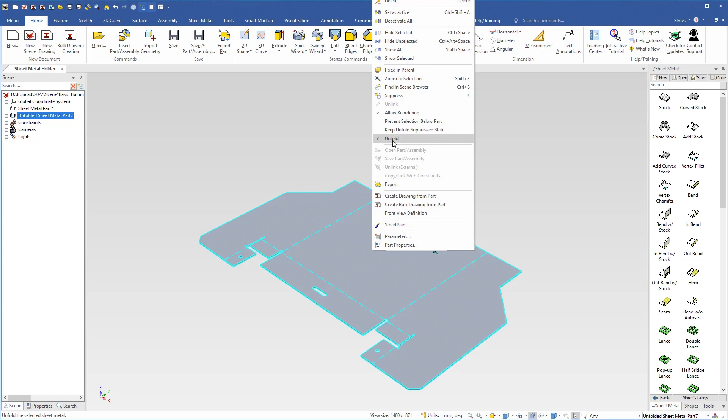To refold the holder, you select it again, right-click and uncheck the Unfold option here to refold it. And there is another way to do it. If you select the holder, come up here to select Sheet Metal tab, and here you have Unfold Sheet Metal to unfold that holder. So to refold, you select the holder and come up here to refold the holder again. But the easiest way to do it is to select it and then right-click to unfold.

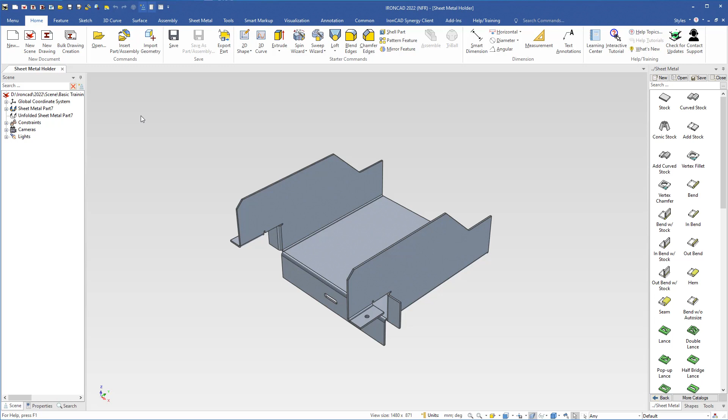So now when we have unfolded the holder, we have also an unfolded part here in the scene browser. Now it is suppressed. But when we have this unfolded part, now we can create a drawing of it. So I come up here to click this button to open the template window, and at the bottom we find a template, scale 1:1 for DWG export. I will select that template and click OK.

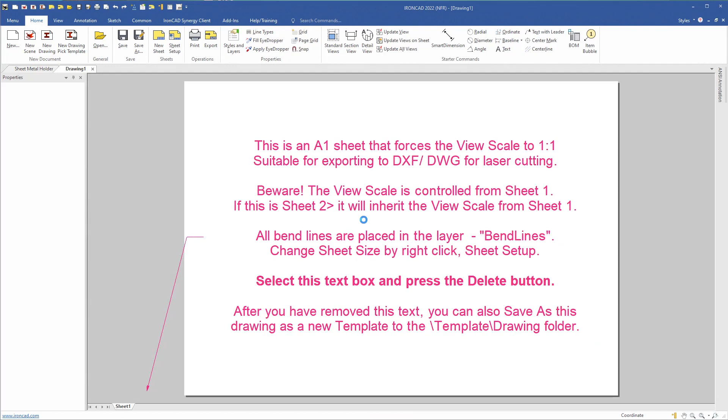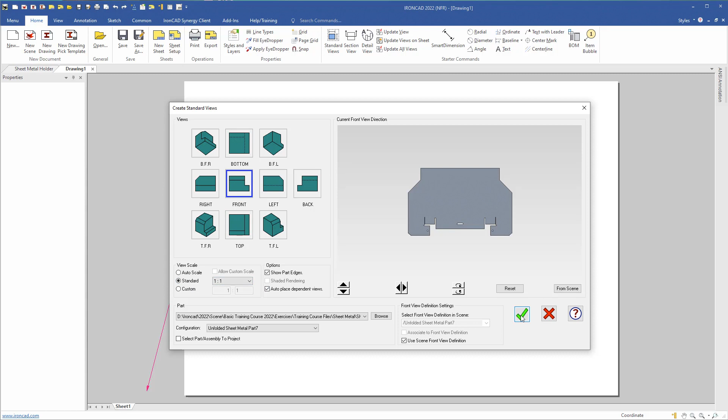And the view creation window will open. Then I come down here to configuration and select the unfolded sheet metal part. So now we have the unfolded part here in this view creation window, and if you want to rotate this view, you can use these buttons to do that. But I will have it this way. So this will be the front view, and the standard scale will be 1:1. Then I click OK and place the view here. And this text box, I select it and delete it.

So now we have the view and also some information about where to bend to fold this holder. And you also have some information how many degrees you have to bend, also which radius you have to use. But we don't need this information when we are going to export it as a DXF file or perhaps send it to a laser cut machine. So we have to hide this information.

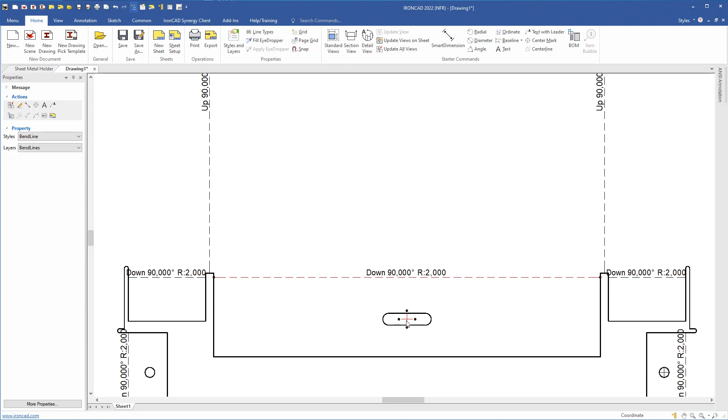And to do that, I will first select this text to see which layer it belongs to. It belongs to the text layer. And this bend line belongs to bend lines. And this center mark belongs to annotations. So I come up here to select styles and layers. Down here, available layers, I can turn off the layers I want to hide.

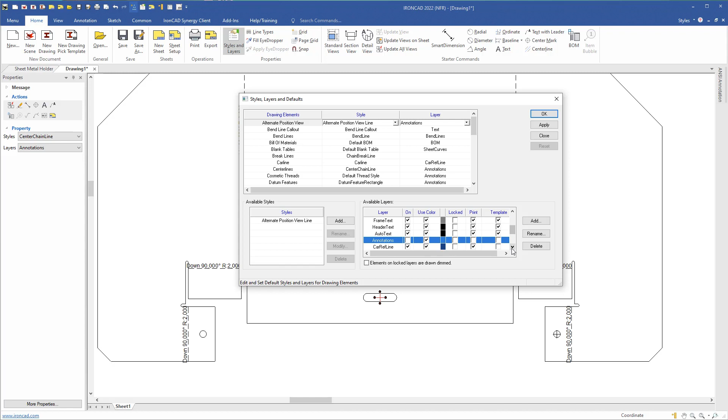So the text layer, I will turn off the text layer. And also, let's see now, annotations and bend lines. Like so, and then I click OK, and that information is now hidden. So now we can export this drawing as a DXF file.

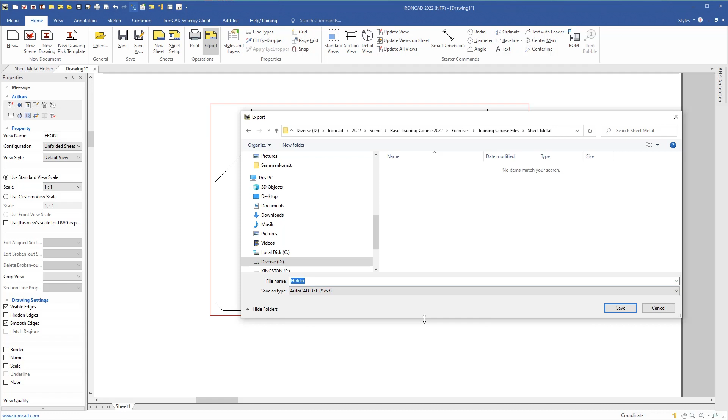So I come up here to click Export, and I will save it here in the sheet metal folder, double click, and I will save it as holder, and I will also change the type of file. I will change it to DXF. Then I click Save, and this dialog box opens, and here I can choose which version of DXF I want to use, but I will use the default setting here.

Then I click OK, and it will be saved. Then I click OK here. So now this drawing is saved as a DXF file. So this is how you unfold a sheet metal part and export it as a DXF file.